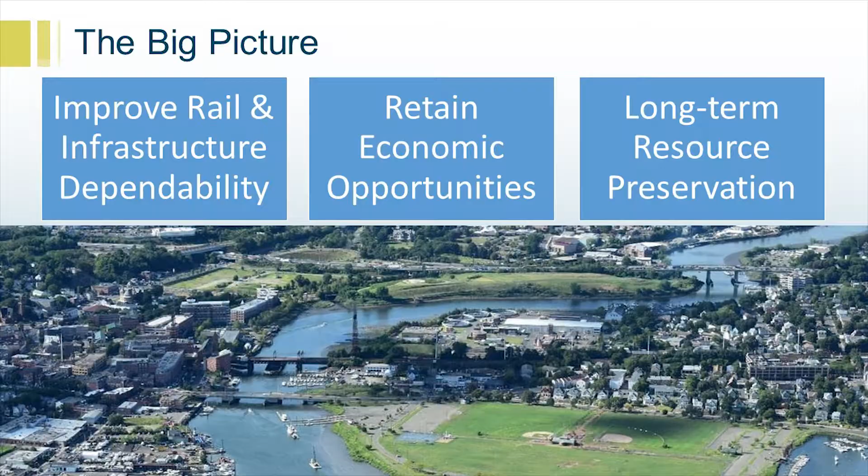Some of the other things associated with the program are benefits that will be achieved. Obviously, it will be a signature bridge, something that could be a center of community-based activities, and something for the city and the surrounding area to celebrate. There are bike and pedestrian trails, we are doing the 4D theater, like the mayor alluded to, educational exhibits and interpretive panels and things like that. We're also working on the whole wharf area where the old IMAX was, and improvements that could be accomplished there.

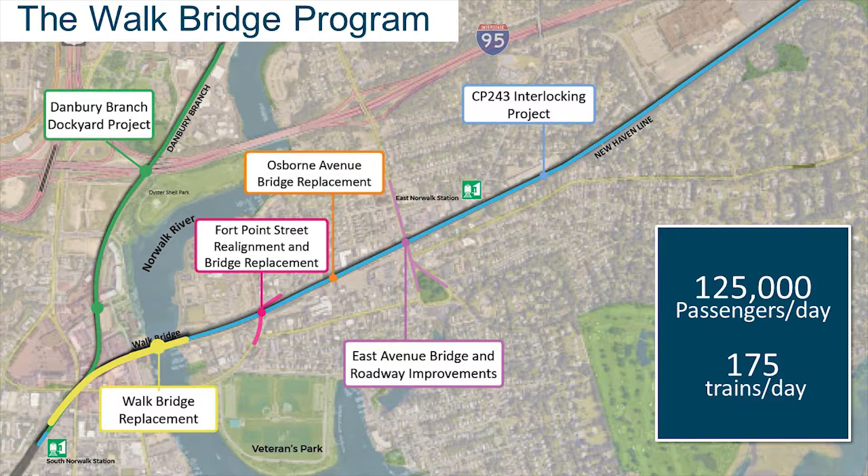So in terms of the program itself, it is made up of 6 individual projects. All of these projects were identified from a need standpoint, really from the age of the infrastructure and things of that nature. Shown in green is the Danbury Branch Dockyard project. That project is currently in construction, as is the 243 interlocking project out by Norton Place. The other projects associated with the program are the Walk Bridge replacement, East Avenue Bridge, Osborne Avenue, and Fort Point Street. Again, these are all rail operational infrastructure improvement projects, 100 plus years old.

So I'll talk a little bit about each one of the individual projects. Fort Point Street - we made the decision about 12 months ago to build this offline to the west. So that is shown here, right? This is the new bridge. In terms of Fort Point Street, this is the existing alignment. That gives us a couple of benefits. A, we're able to maintain traffic on the existing alignment throughout construction, so that's beneficial. I think anybody that's gone through Fort Point Street understands the safety and visibility and sight lines that are kind of a challenge there. So by lining it up with South Smith Street, we alleviate some of those concerns. There will be a temporary signal installed at Fort Point Street during the course of construction in order to facilitate construction.

So that covers Fort Point Street.

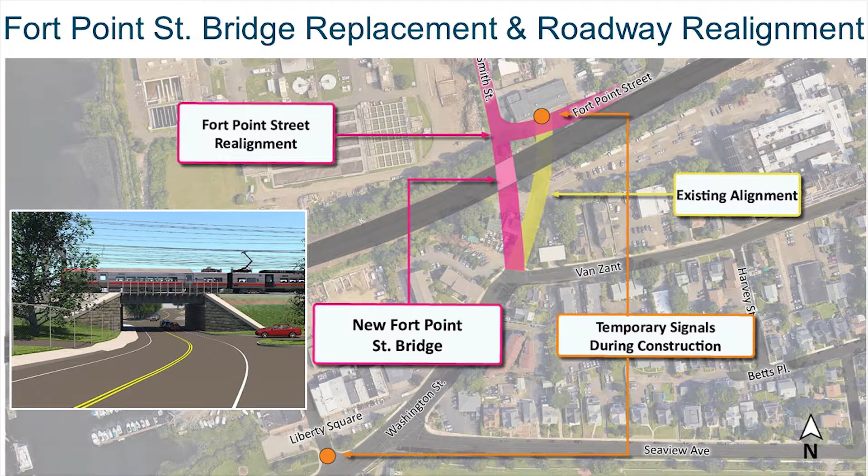Osborne Avenue, again, we're going to be doing a superstructure replacement and substructure rehabilitation. This is a bridge as well, 100 plus years old. We are coordinating with the Spinnaker development, the proposed development over here.

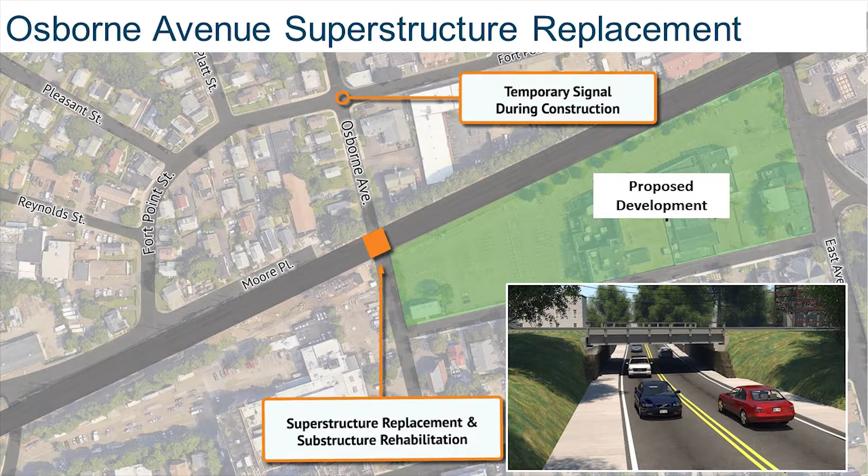We are anticipating two 150-day closures of Osborne Avenue. Later on, I'll go through the detour, and there's a traffic station you can get into and look through that. There will be a temporary signal to facilitate traffic operations during construction at Osborne Avenue and Fort Point. This is a visual over here. It's essentially the same cross section. There will be sidewalks on both sides of Osborne Avenue.

East Avenue Bridge and roadway. This again is a project that's been on the books for 20 plus years. Sue Prosy could probably say exactly when it was initiated, but 25 years. So we're excited, and I'm sure the city and others are excited to get this project done as part of the program.

We are going to be making some parking lot upgrades in the vicinity of the East Norwalk Station. We are going to be extending the platforms that's shown here, so that we can have 10 train car platforms, so you won't have to shuffle between train cars to get off and make sure you're in the right spot. There will be elevators provided basically in this area on each side of the tracks to provide access to the platforms from a handicap standpoint.

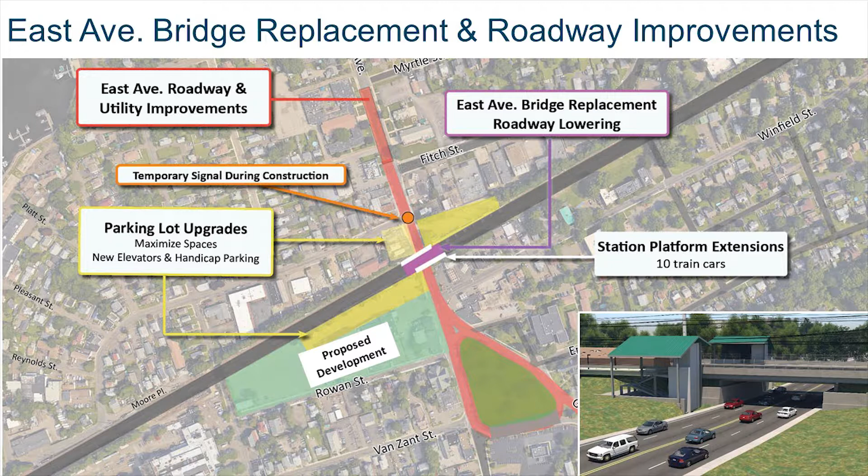East Avenue underneath the bridge will have two lanes in each direction. So that's certainly a significant improvement. The vertical clearance currently is 12 feet 2 inches, and it'll be increased to 14 feet 3 inches. So that's all consistent with prior information provided on the East Avenue project.

The Walk Bridge replacement project itself consists of the replacement of the bridge. We have approach work leading up to the bridge. We go all the way back to the Y as part of the Walk Bridge project. The existing high towers, which are on each side of the bridge, currently carry the Metro North cables. They will be relocated underground, basically, from the Marina property to the old IMAX site. That's where those will be going. And then there's associated work and rail system improvements as part of it.

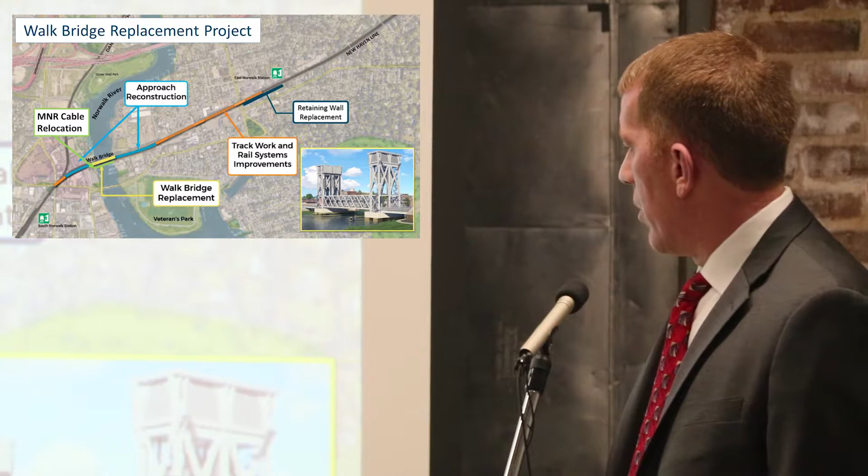I think people are aware, Walk Bridge, built in 1896, certainly has outlived its useful life, and we want to build a new bridge shown down here, which I'll talk through some of the additional design considerations. The new bridge is a 240-foot vertical lift, with two individual spans of two tracks each. So that's what's going on in terms of the Walk Bridge.

We will be dredging as part of the project right in this area where the existing pivot pier is. We will be doing some dredging, and that's kind of right up front in the project in order to take care of that.

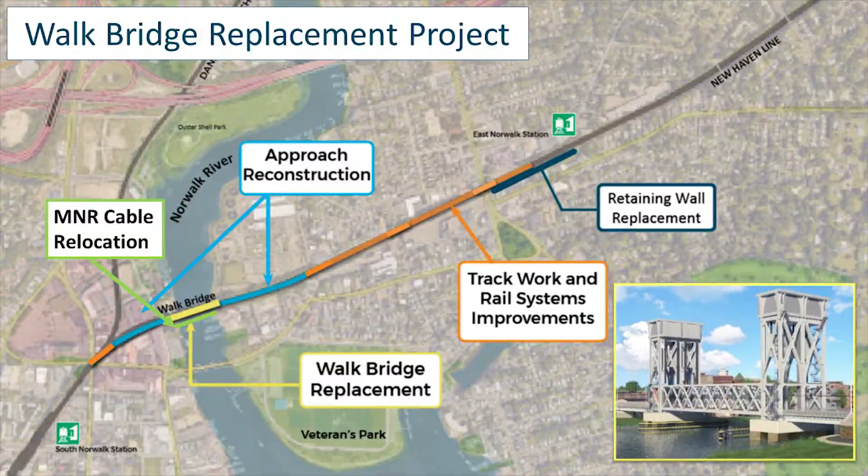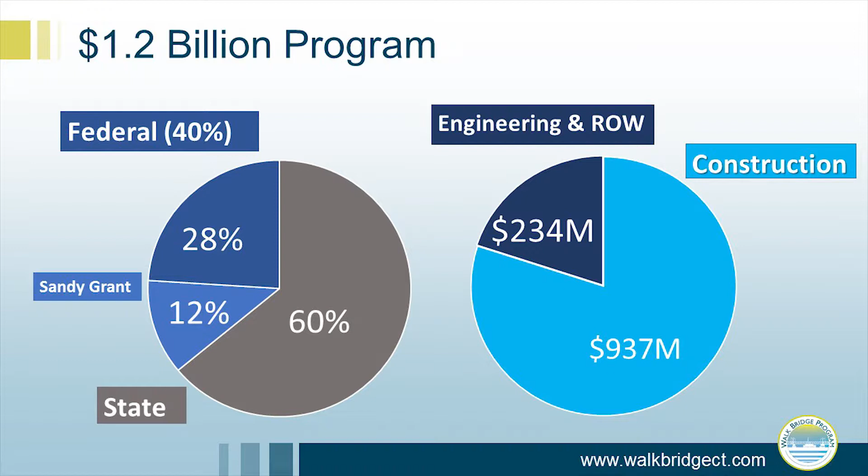In terms of program costs, it is a $1.2 billion program. Those 6 individual projects make up that $1.2 billion. It's not just for the bridge. The program budget right now is comprised of approximately 40% federal, 60% state. You'll notice that 12%, probably a lot of people have heard about the Sandy grant that the state and the program was fortunate to get. That was provided in 2014. So we do need to show some progress as far as expending those funds. With any project, there is cost associated with engineering and rights of way, and then the balance of the project is with construction.

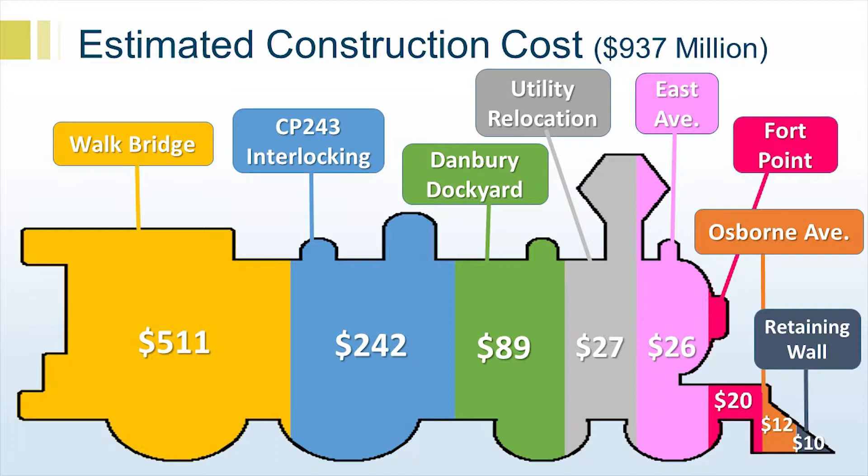So this shows you the split of the $937 million that I talked about. Approximately half of the budget, or the $937 million, 50% is associated with the Walk Bridge. The balance is associated with those other 5 projects. CP243 and Dockyard, which are ongoing work, and then the other projects which will be part of the Walk Bridge project itself. All of these are basically rail and infrastructure upgrades that are required, going back to the 100-plus-year-old condition of the infrastructure.

In terms of the bridge design itself, there are 2 individual spans at 2 tracks each. We did work with the Design Advisory Committee, and we came up with this arch design, which is featured throughout the tower. You'll see it on each side here. We did also incorporate it into the railing on the approaches as far as the arch designs, and you'll see there's a little bit of an arch up here. We did work with the Design Advisory Committee on this machinery room. That's what this structure is up on top.

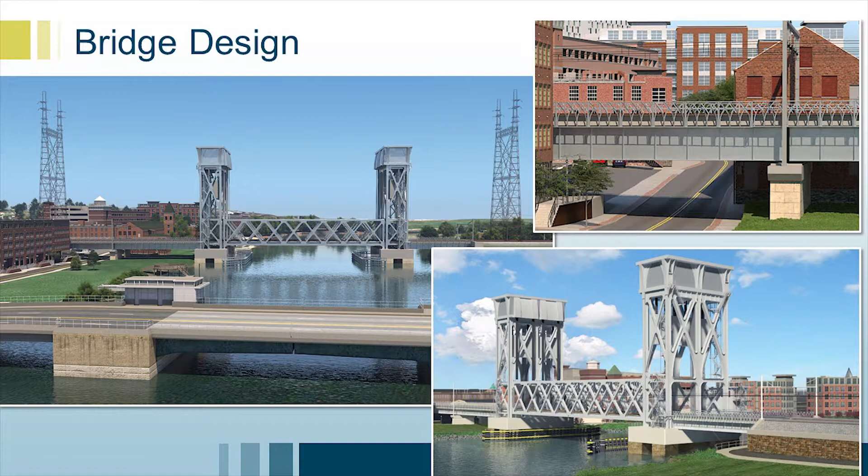From a height perspective, this is about 140 feet from the track elevation. For a reference point, the high towers are about 235 feet. So again, these are 140, these are 235, a difference of 95 feet, give or take.

Other design considerations: there is ongoing coordination with the city, agencies, and other stakeholders. Certainly it's our objective to enhance the waterfront. We will be dredging the river in order to maintain navigation.

You'll notice basically what's going to happen here is that the future channel will line up very nicely with the Stroffolino. I think this channel width is about 170 feet, give or take. So that's certainly a benefit.

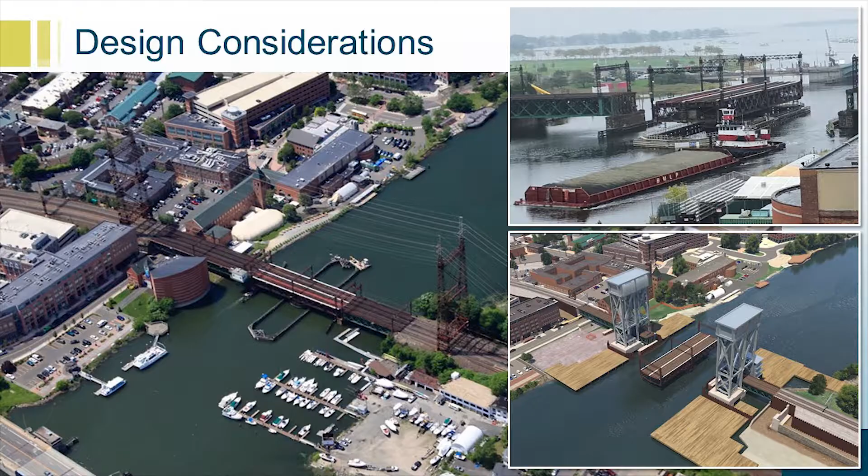Under this alternative, like I said, this swing span will be operational, so we're able to maintain 4 tracks for a significant portion of the time. Dominic will go through when we start switching over to the 2 tracks. The preferred option also allows for the viability of the river going up. We are going to do some dredging, and allow for future dredging as well, and also development opportunities and things of that nature to the north.

So the North Water Street area does see quite a bit of change, if you will. The existing IMAX site is cleared. We are working with the city to understand what might be a vision for this area, the wharf, as we call it. There's certainly some opportunities. There will be an extension of the bike trail; we're doing it on the east side, and we have committed to also doing it on the west side. It's just a matter of exactly how that lays out with all the other plans considered for the wharf area.

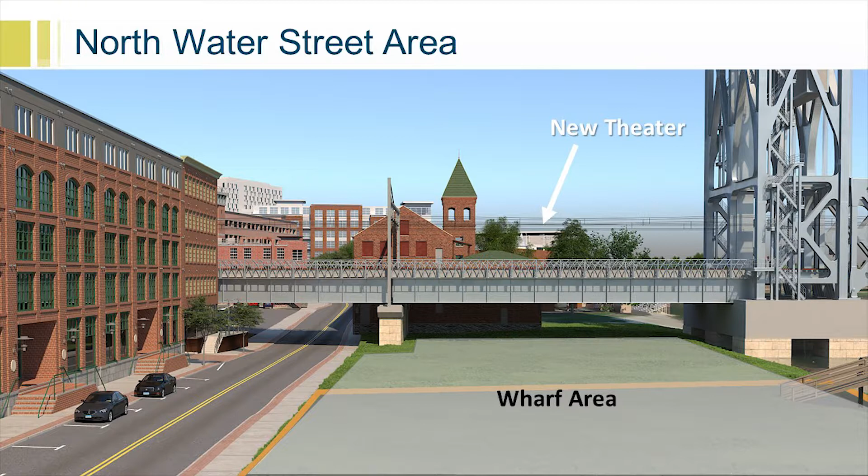You'll notice this pier here, which will be right adjacent to North Water Street. The existing abutment right now is pretty close to the road, just down there basically. The future abutment will be back, I want to say about 90 to 100 feet. It'll basically line up with the lock building where it juts out here. So this whole parking lot area underneath the structure will be open.

We are straightening out the roadway here. There's a little bit of a jog currently. The vertical clearance goes up to about 17 and a half feet, so it's about an increase of 5 feet over North Water Street. So this area really changes. We've been in a series of meetings with Spinnaker, and we also talked about it as part of the Design Advisory Committee, understanding there's a lot of opportunity for some enhancements to be taken care of in this area.

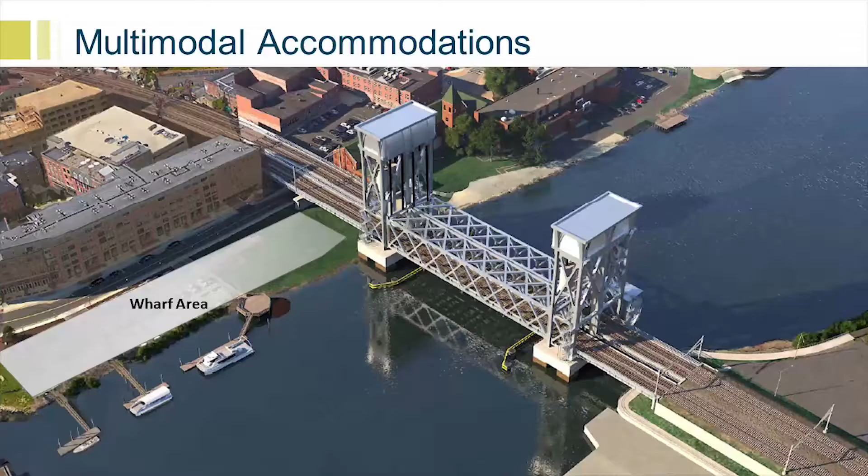In terms of multimodal accommodations, Dominic will go through it. One of the first things we do is get the aquarium vessel and the Sheffield Island ferry relocated down here to the south. We are proposing to leave this southerly dock, so that will be an enhancement to this area. There are pedestrian and bike accommodations also as part of the project, and throughout the project limits there will be roadway and sidewalk improvements for safe bike and pedestrian mobility.

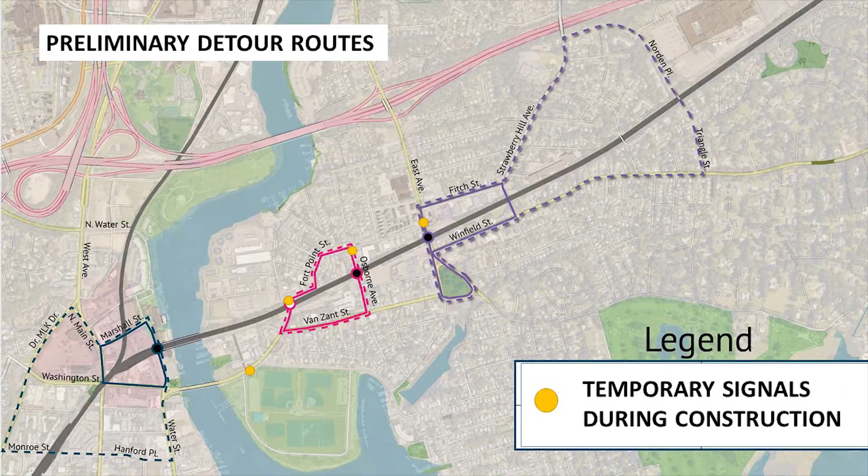These detour routes are preliminary. All these closures will not occur at the same time, and so we will continue to work with the city in understanding the implications of these. We've had a lot of conversations with them and we'll continue to do so. Associated with these, we've also done some outreach to the transit district so that they understand what might be occurring.

So environmental permitting, and certainly, like I said, the river is a resource for the city as well as the state. We will be incorporating standard stormwater management and contaminated soil management. We do have historic resource protection. We did do a test pile program to understand vibration and noise. So those will all be included as part of the project.

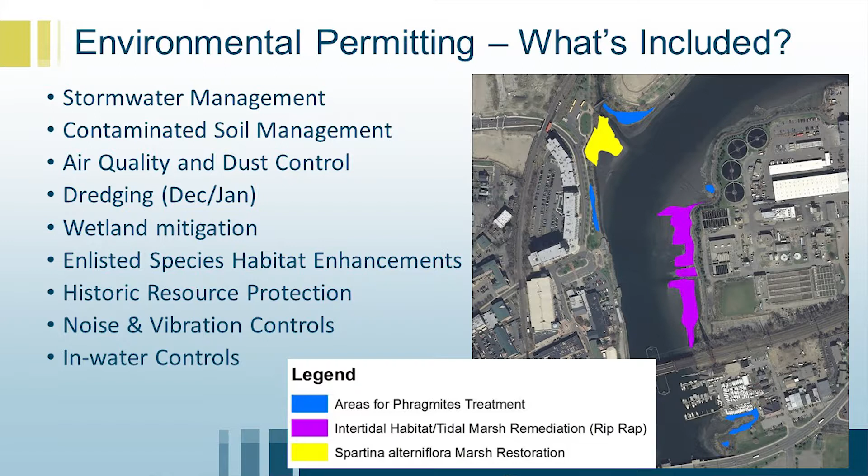We will be doing dredging in the vicinity of the pivot pier. We have to do it also for the vessel relocation, and then also for our contractor yard, which is down to the south of the Stroffolino. Those are our three dredging areas right now.

In terms of environmental restoration, we will be treating and eliminating invasive species within and adjacent to the existing salt marsh, and we'll replace that with native plant life. In restoration and construction of habitats for the wildlife, we'll coordinate that. We've done a lot of outreach already with DEP, the Harbor Commission, and the Shellfish Commission, and we will continue to do so as we develop our plans, mitigation, and specifications for the start of construction.

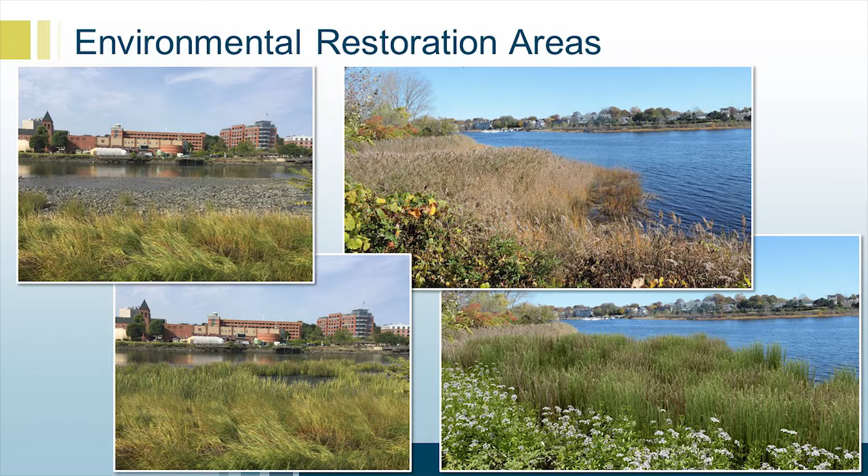Okay, so with that, I'm going to hand it over to Dominic, and he's going to run through the construction. He took you through the design and development part of this project, and I'm going to take you from there to the end, which is the construction part of it. I'll talk about schedule, then we'll get into some of the ongoing activities out there, and then take you through the walk bridge and how we anticipate building that on a yearly basis.

One of the first things I wanted to mention is the delivery method for this project is very unique to us. It's called CMGC, which stands for Construction Manager / General Contractor. As opposed to how we normally do it, which would be designing a project, putting it out to bid, and then constructing it with a low bidder, we bring in a general contractor or construction manager during the design phase. This is a contractor with experience in this type of construction. They come in during our design and they're part of the whole team effort in getting this project to a biddable document. So what that does is it puts all the ideas on the table: innovation, identifying any and all risks that may be associated once we get out there. All that helps us basically get a set of plans and a project that, when we're out there, we're finishing on schedule and within budget. That's really the goal of any construction project, that's what we're trying to do, and it's working well so far.

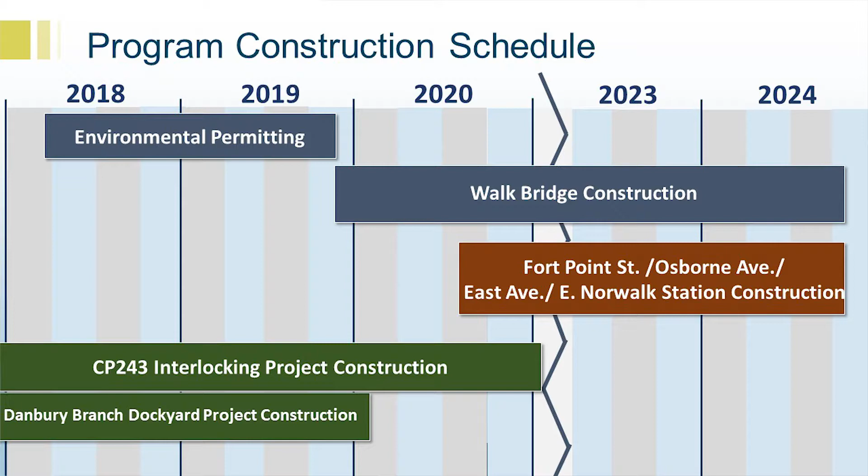As Jim mentioned, Fort Point, Osborne, East, and East Norwalk Station construction will be ongoing, tying in with the end of this construction schedule. Also going on now, during some of the walk bridge construction, is the CP 243 interlocking on the east side, and the Danbury Dockyard, north of the Y, as Jim mentioned earlier.

The Danbury Branch Dockyard project, which is going on right now, electrifies the branch from the Y up north through South Norwalk, up towards north of Danbury, towards Wall Street. It electrifies the tracks and allows trains that end in South Norwalk to be redirected back towards New York.

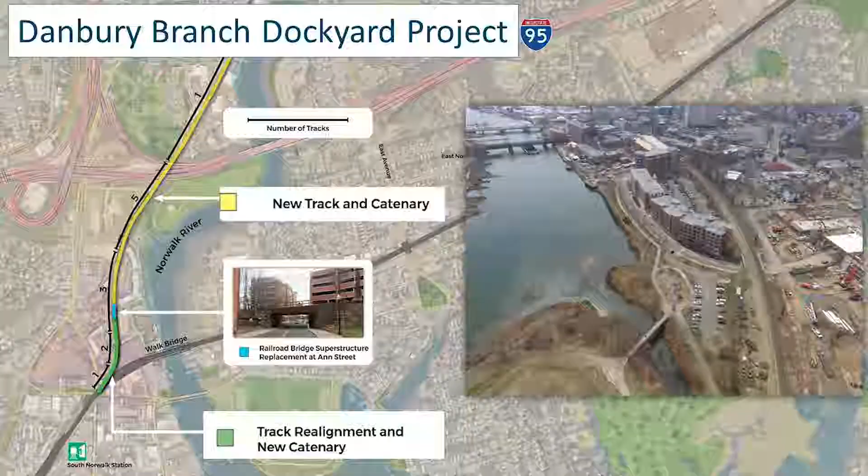Currently that redirection is happening on the walk bridge itself. So by building this dockyard, it'll allow us to reconstruct the bridge and bring it down to two tracks, without interfering with this dockyard or with the train redirection.

Here are some active construction photos. You have the Danbury Branch right there on the left. You can see some of the overhead contact system, poles, and foundations that were installed, along with some new track. That also affects, to the north, the Ann Street Bridge.

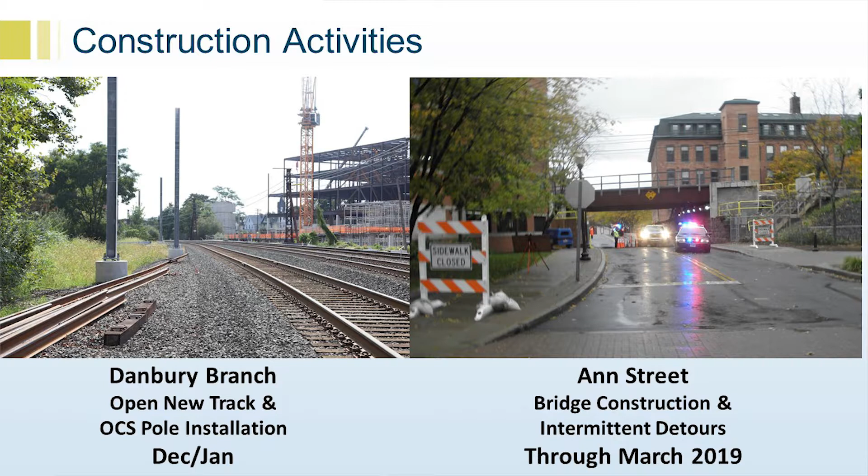That's in construction now; we have a little bit more work to do on that one. It's going to be closed during phase 2, from early December through mid-March, which will finish out and complete the Ann Street structure. It will be open after that.

Now taking you more towards the east, the CP 243 interlocking project. Actually, the footprint of the project goes all the way to the Y, but the majority of the work, the new tracks, switches, and interlocking system, is going on in this area here. That work has started and is going on right now.

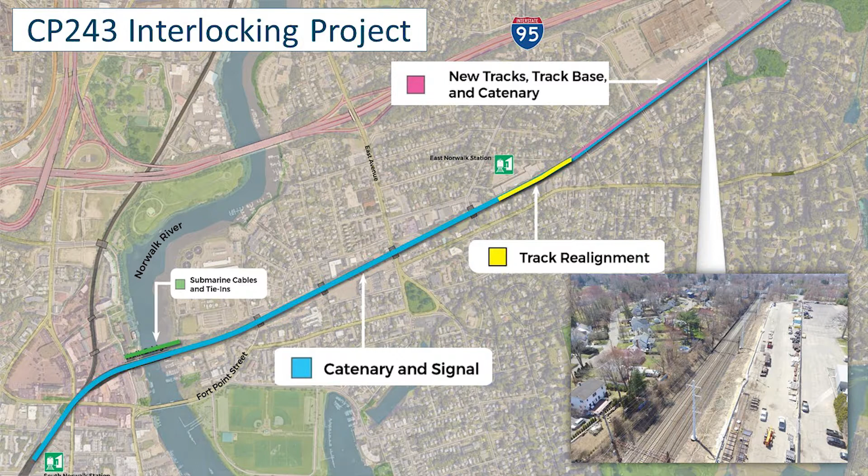There's a lot of reasons to do this, but it had to be done anyway. Basically, between the Sono station and Westport station, there was no interlocking system. An interlocking system is basically switches on the tracks that allow the train to go from one track to another. They don't have anything from Sono up to Westport station, and it needed to be done anyway just to maintain travel service for the trains.

It also helps us build the walk bridge, because we're going to end up bringing that down to two tracks, as I'll show you a little later. This will allow train movements to get into the tracks they need to be in to maintain service, so service is minimally interrupted during construction, except for a couple of long weekend closures that I'll talk about in a bit.

Also, we have some pictures here of active construction. There's the new signal house, a rendition of what's going on right now; we're going to start construction on that in December. They'll be working days, nights, and some weekends to do that work. That's the CP 243 track work, ongoing right now with some rock cuts, slope protection, and some foundations being installed too.

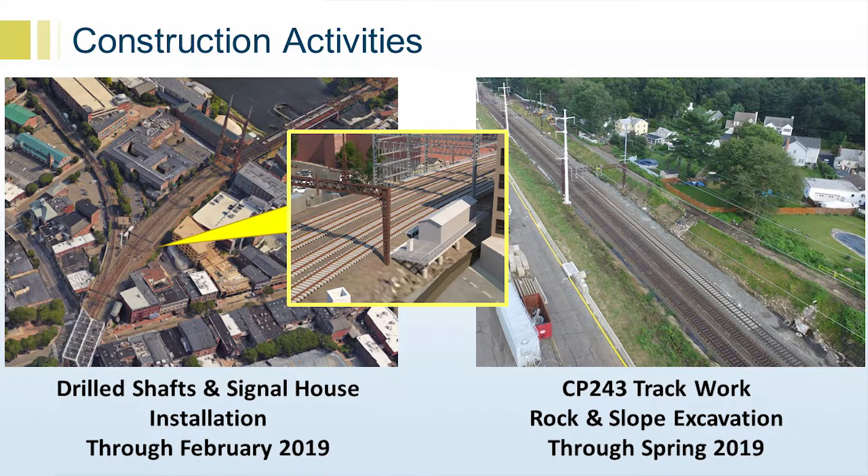Now I'm going to take it year by year for the next five years on the construction of the walk bridge itself, and how that ties into the other bridges down the road that are part of the program, and how we're able to put those in with the reconstruction all at the same time because of the track outages we're taking advantage of.

In the first year, you're really not going to see a lot of construction above the structure at all, because it's mostly in-water work. You'll see some of the trestles being built, the relocation of the IMAX going on at the same time, the staging being put up, and some of the staging yards built out.

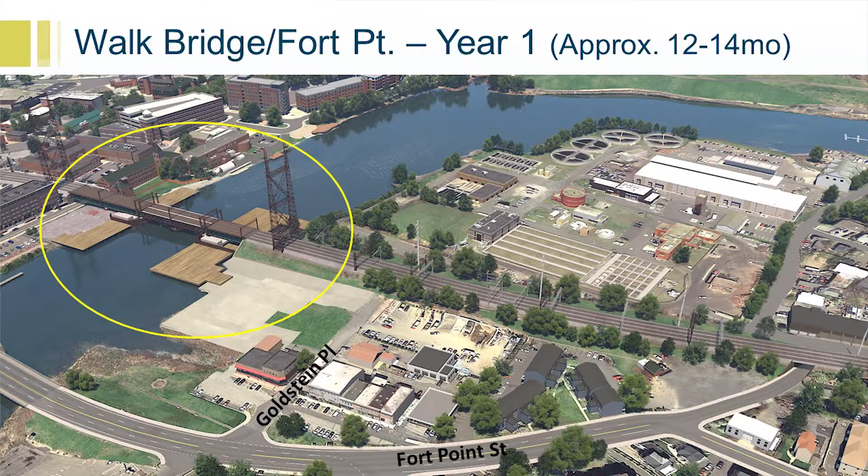Relocation of the vessels to the south - as Jim mentioned, they're not in this drawing, but they're down in this area. That'll be going on. We'll have some utility relocations, and there'll be some North Water Street temporary closures and lane closures to allow for this work. That's pretty much all you're going to see in the first year. It's a lot of work, but it's in-water work that you really wouldn't notice unless you're out there looking.

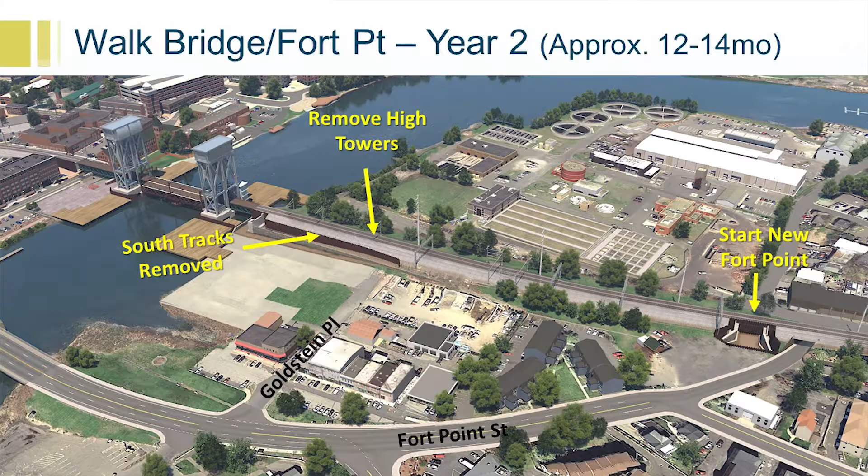Year number 2 is when we start with the southern 2 tracks that we take out of service. Here you can see there were 4 tracks, now there are only 2. The southern 2 tracks are out of service, which allows us to work on the southernmost tracks and remove and replace them - I'll show you in a minute how we do that with the floating. That's going to take advantage of Fort Point, which is built offline here. This is the existing - here we are offline. The southern 2 tracks are removed, and we'll be working on Fort Point at the same time as the walk itself.

Further up the line, East Ave and Osborne will have the same thing happening. Again, down 2 tracks - the southern 2 tracks are removed, and that allows us to reconstruct that portion of those 2 structures.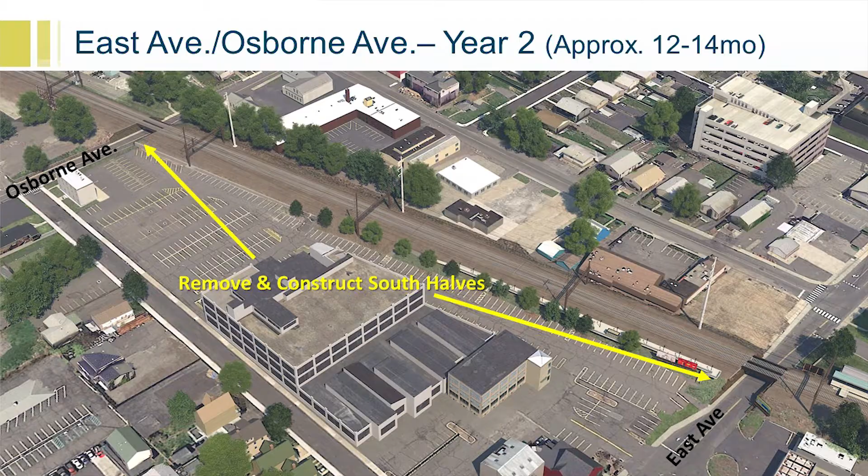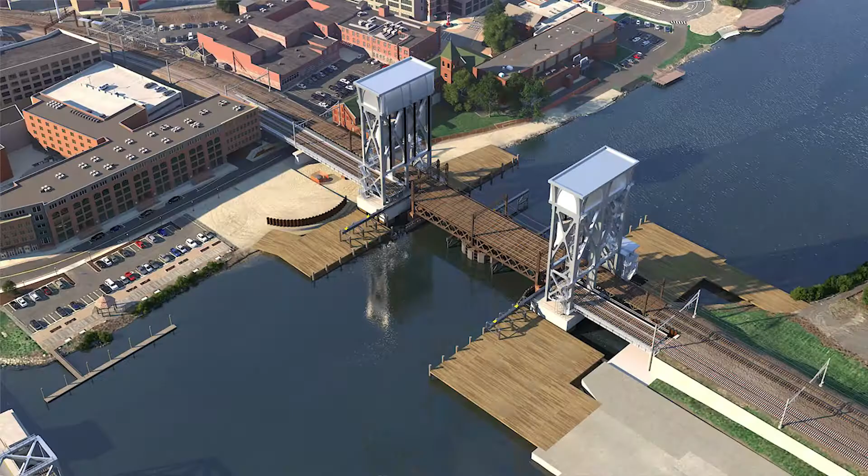So I have a video now of the float out and then the float in, I guess you could say. We're going to be removing the existing structure here, floating it out, and then replacing it with the southern 2 tracks. Like I said earlier, for the majority of this project we're able to maintain 2 tracks at all times. This will be one of those extended weekend closures where all 4 tracks will be out of service, okay?

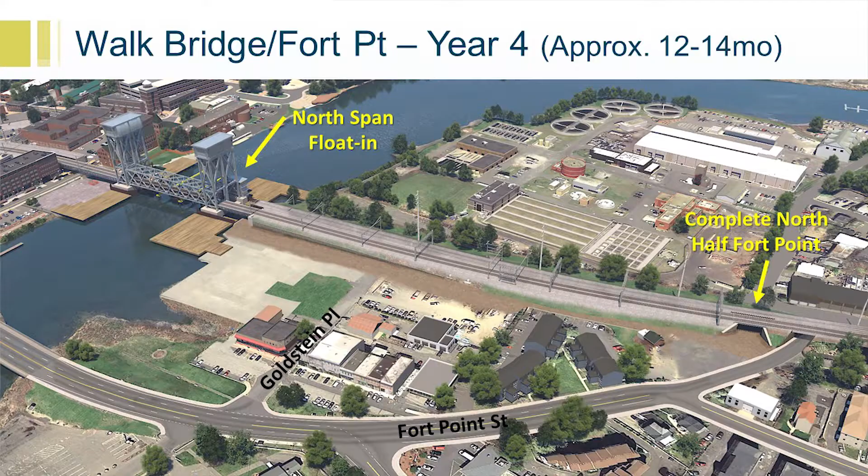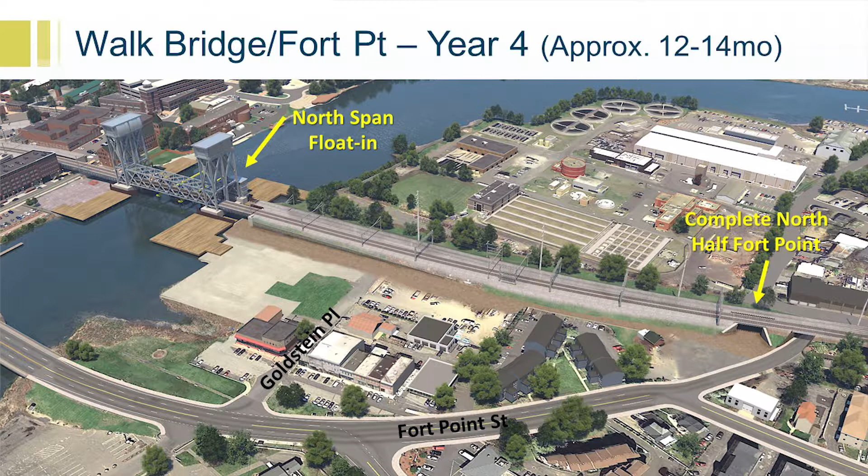Now year 4 is where we talk about the north span float-in. We're going to complete the walk bridge north half, float it in, and complete the track and catenary and other rail construction in the northern half. At that time is when we begin removal of the pivot and rest piers of the existing structure. We're also completing the north half of Fort Point at the same time, because you can see these tracks here are removed - so now we're able to work on the northern part of Fort Point.

And here's how the float-in is looking to go on the second, northern half.

Further up the line, East Ave and Osborne, year number 4 - we're going to remove and reconstruct the northern halves on those structures at the same time, taking advantage of the 2 tracks that are out for the walk bridge.